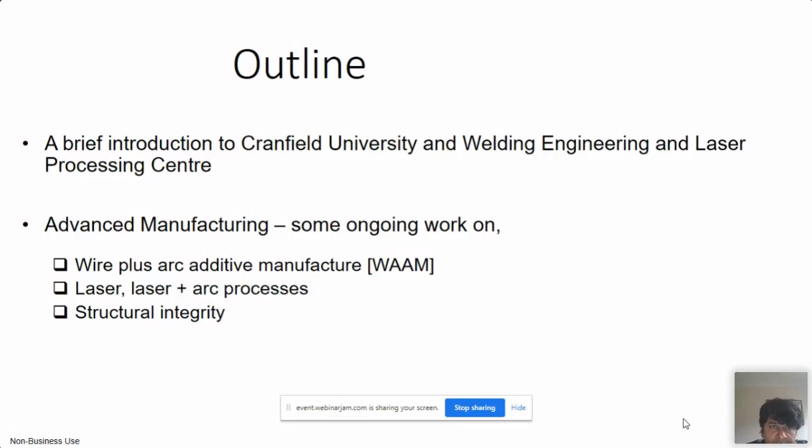First I will give a brief about where we are. We are in the United Kingdom, separated at the moment by about 5,000 miles. Within the United Kingdom, we are located about 50 miles north of London. Our nearest airport is Luton Airport, and Heathrow is about 50 miles south of us.

A little introduction to Cranfield University. It was basically a Royal Air Force base during the Second World War. By the end of the war, it was realized that so much information had been generated during that period that it would be a waste if everything were wound up. So the College of Aeronautics came up in 1946. In 1969, Cranfield Institute of Technology formed, which could give university level degrees. And from 1993, Cranfield University formed.

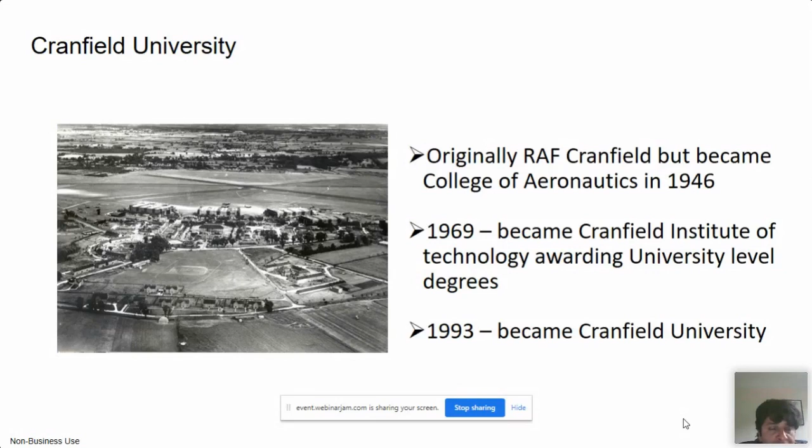I will say a little bit more about our main research activities. We are the UK's number 1 university in aerospace engineering and technology postgraduate education. We are world number 10 in customized executive education. In mechanical, aeronautical, and manufacturing engineering, we are ranked among the top 40 places. Our unique facilities include the Aerospace Integration Research Center, Crash Impact Center, Secure Site, National Wind Tunnel Facilities, National Reference Center for Soils, and Facility for Airborne Atmospheric Measurements.

Here is a bird's eye view of Cranfield University as it is now. You can see this huge runway, which is about 1.2 kilometers long. We have about 4,500 postgraduates. We are a postgraduate university, and our main focus is applied research, which you will see in my next slides.

Our distinctive strengths - on the left hand side you will see the different themes distributed across 4 schools: aerospace, defense and security; energy and power; environment and agri-food; and school of management, manufacturing, transport systems and water. I am part of the manufacturing team, and furthermore I am part of the Welding, Engineering and Laser Processing Center.

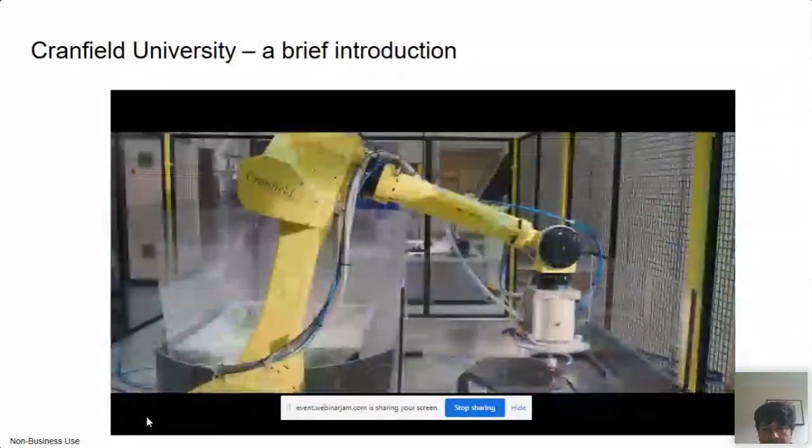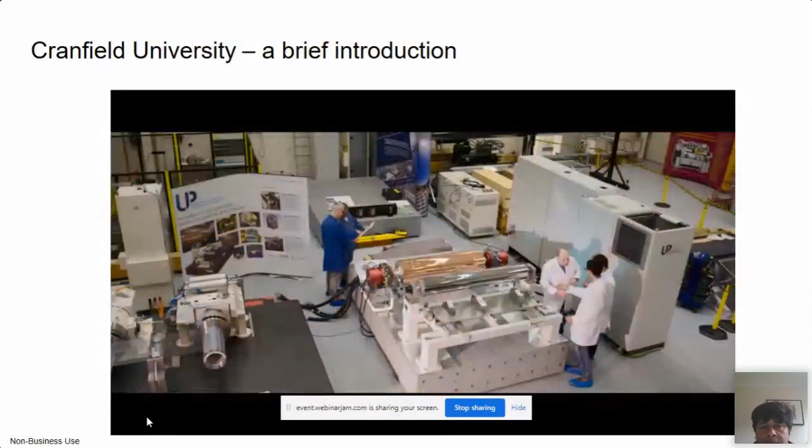As an exclusively postgraduate university, we take learning to new heights in technology and management. We award over 5% of the UK's engineering and technology PhDs every year. 81% of our research is classed as world-leading. Our academics find solutions to global challenges. Our graduates leave ready to launch into high-flying careers. That's why we rank in the UK top 5 for both commercial research and professional development. Everything we do is in partnership, whether it's with individuals, business, government, or industry. Here at Cranfield, we like to aim high across technology and management. Our work reveals new horizons, and we create the leaders to get there.

So this was a brief introduction about Cranfield, and now I will talk about our center, the Welding, Engineering and Laser Processing Center. In the red rectangle on the left hand side image, you can see the size of our building. It was founded in 1961, though not located here at that time. At the moment, we have over 600 alumni with MScs and PhDs.

We have about 7 academic staff, increasing in number almost every year, and about 3 technicians. Normally we have about 10 to 12 postdoctoral fellows, about 15 to 20 research students or PhD students, and we run 2 master's courses now, one on welding engineering and the other on metal additive manufacturing. We normally have about 16 full-time equivalent students in welding, and last year the metal additive manufacturing course started with about 10 full-time equivalent students. So I will give you a brief view of our lab.

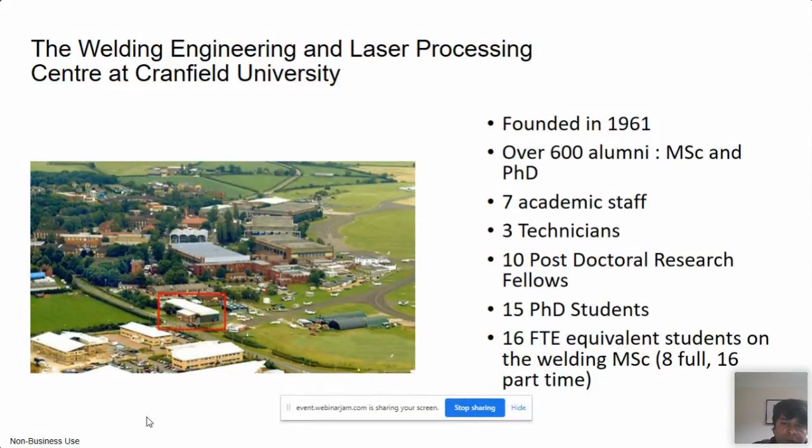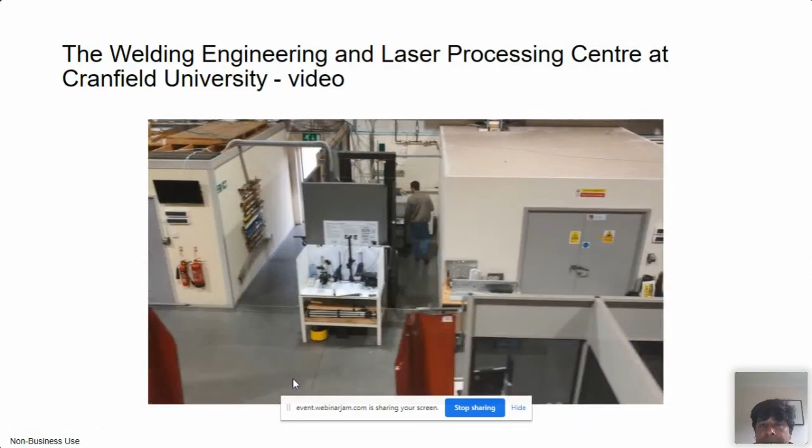So you can see now where we are located. This was done by a student using his drone. You can see the size of our facilities, which I was talking about. It's located over 700 square meters, so you can really do research at a scale where industries feel comfortable, making technology transfer rather straightforward.

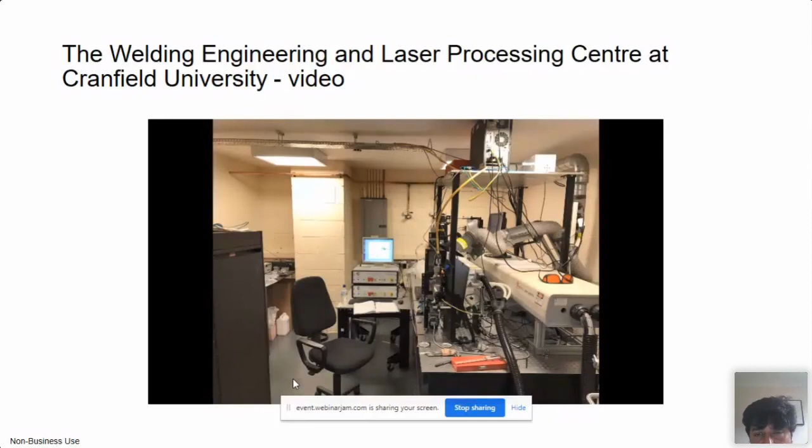We have robotic welding mostly, no manual welding, and what we basically seek to achieve is to understand the welding process. We have all the instrumentation facilities, residual stress measurement facilities, and ways to characterize welds and everything.

These enclosures, as you can see here, are like a tent. We fill this bubble with say argon or something to make an inert environment for manufacturing additive build parts like titanium and stuff.

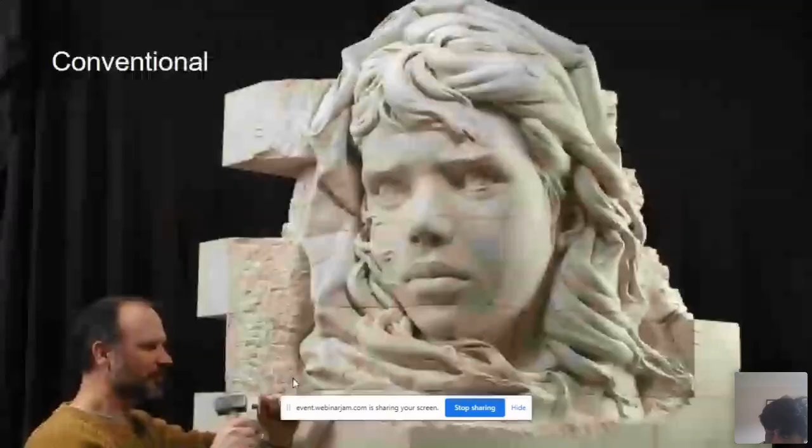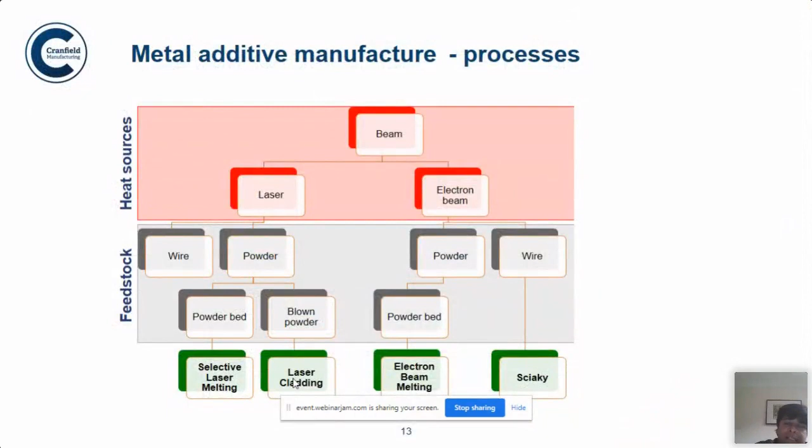I will talk about wire plus arc additive manufacturing now. This is the conventional way of manufacture, where you have a billet and you scoop out the component from it, whereas with additive it's layer by layer deposition. I'm sure you all know about this. We are basically on the right hand side of this image, where you can clearly see we use an arc as a power source, be it TIG, MIG, or plasma.

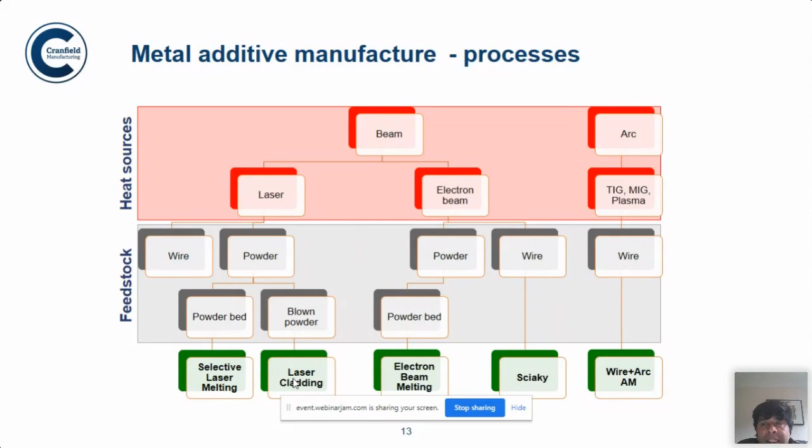This is the major arc, but we also use laser, and we use wire. This is a very clean process because we use wire - when you use powder, the safety requirements and the process can become much more difficult to control, whereas wire is much cheaper and much more consistent property-wise. This process we term wire plus arc additive manufacture.

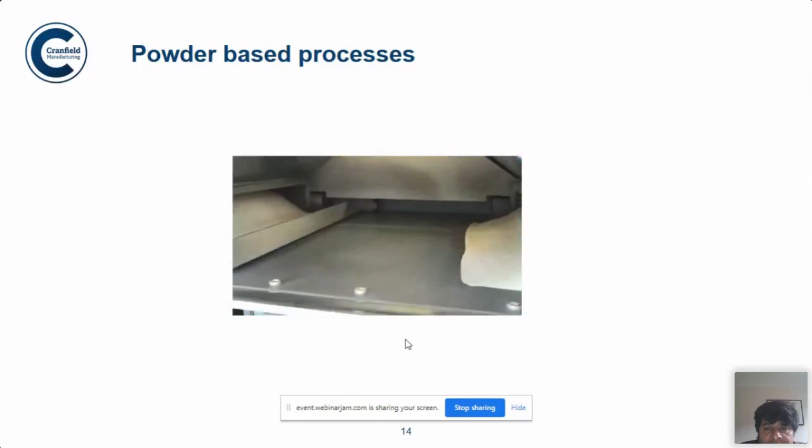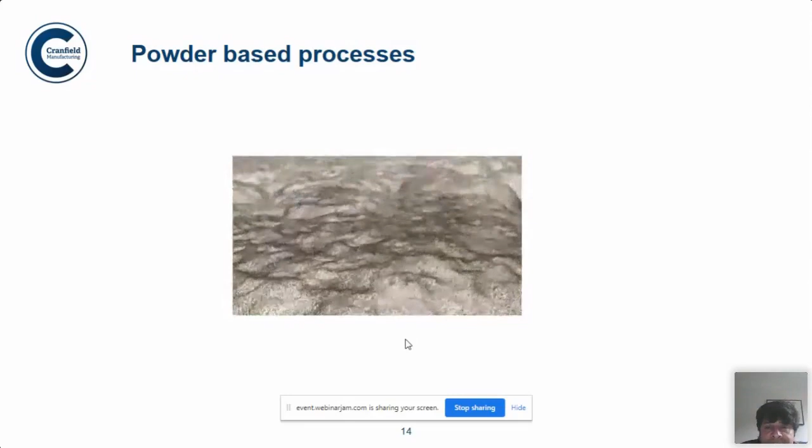I'll just give you some snapshots of what is a powder-based process. As you can see, in the powder-based process you put on powder - this is a powder bed process. Then there will be a laser which will scan the shape in the powder, and the stage will go down, and you sinter the powders together with the help of a laser or a power source, in this case a laser.

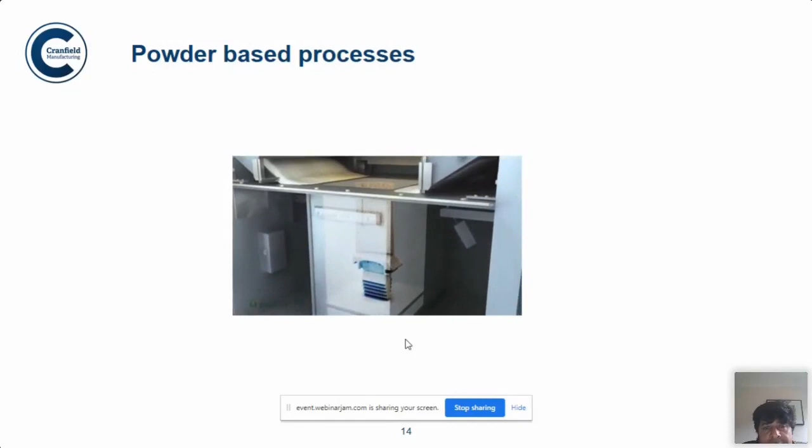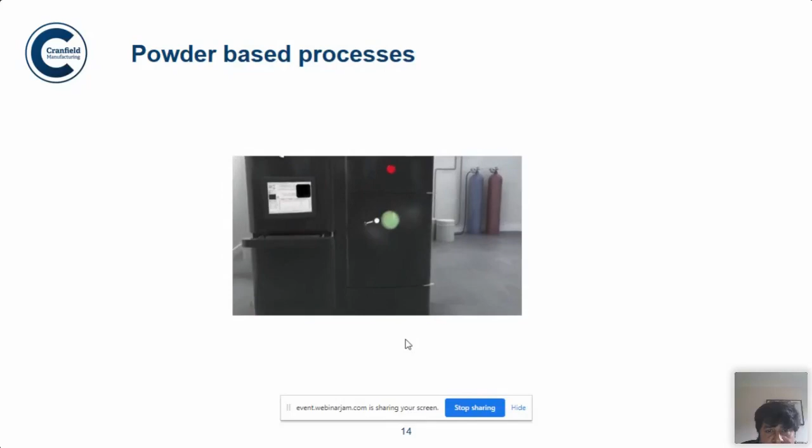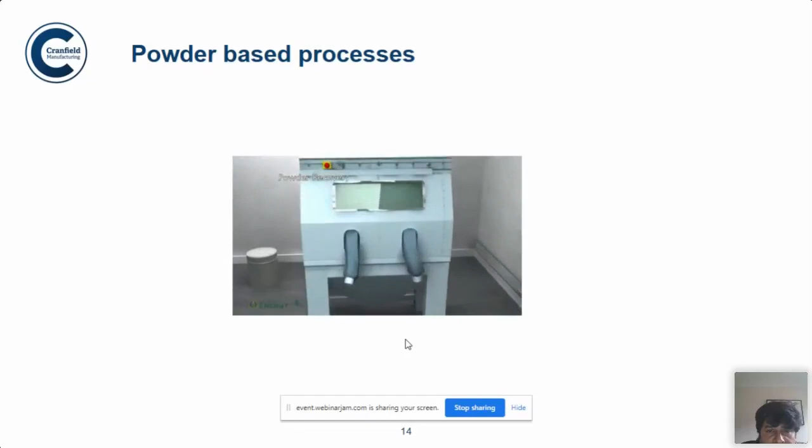At the end, as the bed goes down, you manufacture the component. Once the component is manufactured, it is then cleaned, because there will be powder clinging onto the surface, and you find the component actually sintered inside these superficial layers or superficial powders. So this process is an extremely important process.

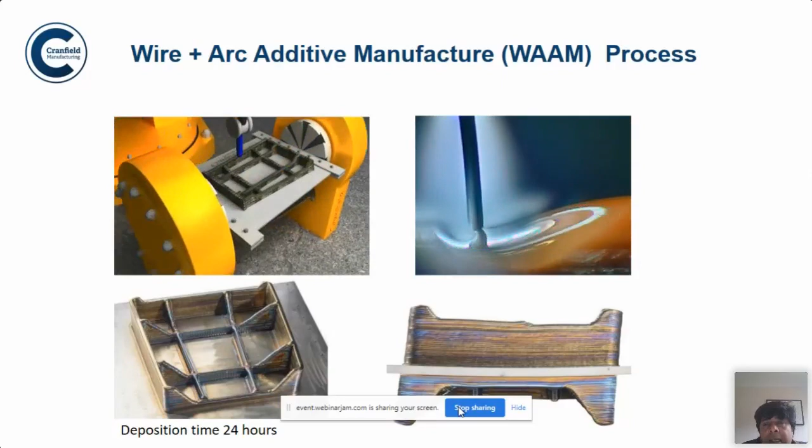Wire plus arc additive manufacture is a different process. I'll just go to the next slide when it's cleared. So this is wire plus arc additive manufacture. In the previous process you saw powder and laser - they are very good at creating very complicated geometries.

The deposition rate in that process is very low. In wire plus arc additive manufacture and near net shape, the previous one is very close to the actual shape and dimension of the component. Whereas in wire plus arc additive manufacture, you see on the right hand side, the ongoing video shows feeding a titanium wire in a welding arc. On the left hand side is an animated image, however on the right hand side, or on the bottom, you can see the real component.

This is a landing gear box made of titanium, and as you can imagine, creating this type of component in a laser plus powder system would be very, very difficult, because the size of the component is in meter scale rather than millimeter scale, and the dimensional resolution you need is not as high as that. So you can machine this and make your component.

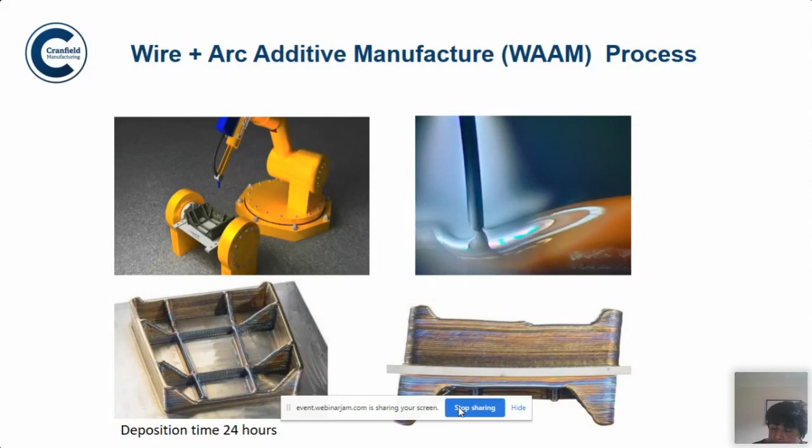So why use additive manufacture for production of large parts? This video shows the importance. You saw at the beginning there's a large billet which was then scooped out to form this part.

When it comes to expensive alloys such as titanium, the cost is prohibitive because you are losing a serious amount of metal. We call it the buy-to-fly ratio - how much you are buying versus how much is actually flying. In this particular example, there is a huge loss of metal because you are machining out, and the scrap titanium is about two orders of magnitude cheaper than the titanium billet.

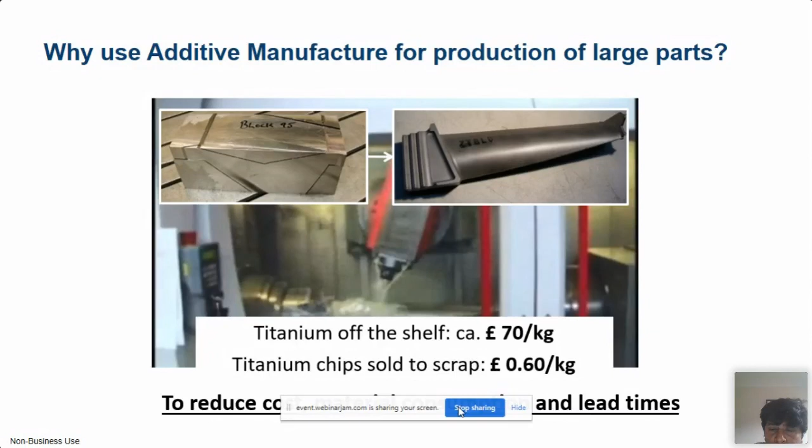So to reduce cost and lead time is the specific business case for wire plus arc additive manufacture. These are the major business drivers: reduce lead and response time, logistical simplicity, supply chain innovation in component design, reduce weight, lighter and more durable, material saving, improve sustainability and recyclability. So these are the main business drivers for wire plus arc additive manufacture.

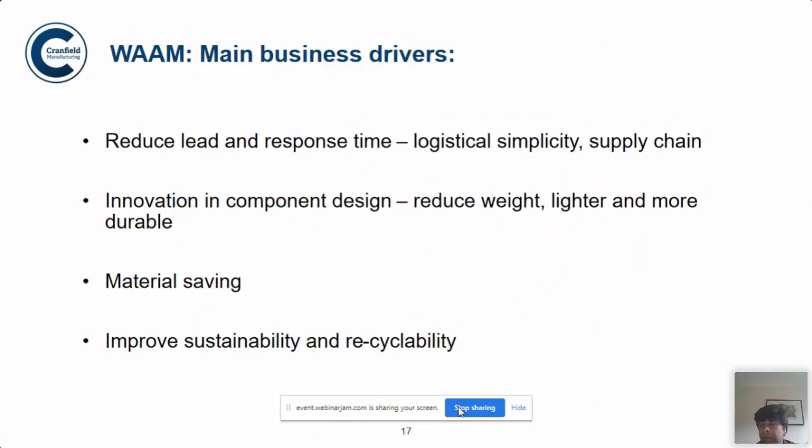Now, there are several attributes shown in this spider diagram, like complexity, accuracy, cost saving, material utilization, mechanical properties, post-processing requirements, platform flexibility, part size and all. You can see different additive manufacturing processes were compared: powder bed, blown powder, laser and wire, WAAM, and higher deposition rate, which is the CIT process.

Now you can see WAAM is placed in a very nice manner for many of the things, particularly cost saving, material utilization, mechanical properties, post-processing requirements. There are many of them that are much lower. I mean, the criteria for selection of this process is much higher.

And the main important thing is buy to fly ratio. When it comes to buy to fly ratio, in case of WAAM, you can easily achieve something like 3 to 1. Which basically means 3 kilos you're buying and 1 kilo is ready to fly. This makes this process incredibly lucrative for businesses. Although powder bed and all those things are very good to create very fine crystalline structure, the deposition rate is not as high, and as a result the cost of production could be much higher.

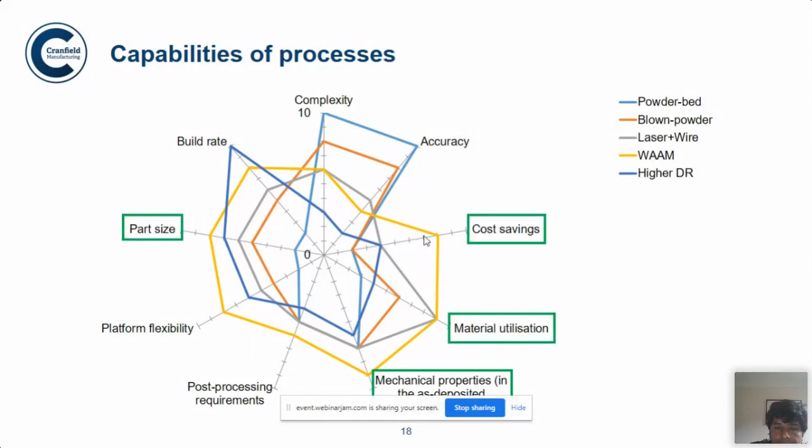So this is a process of shaped metal deposition which I was trying to show here. We started this process quite a while back, and as you see, this is the concept of the component, and then a CAD drawing was made and layer by layer manufacturing was done to create the component. The material is Inconel, number of layers 144, deposition 2.44 hours.

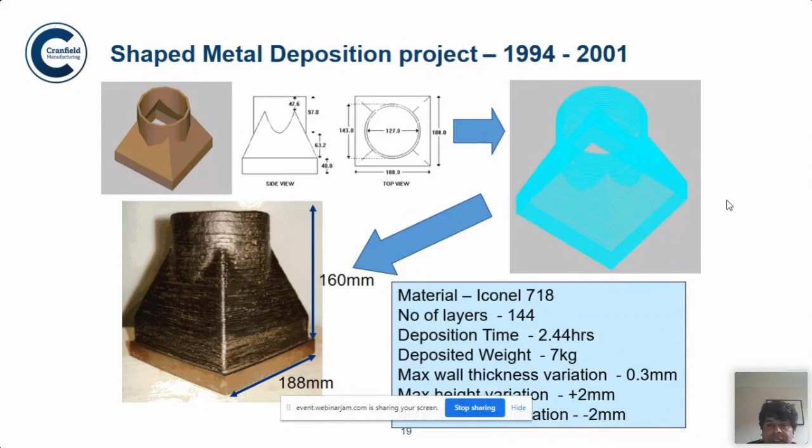And since then, for the last 18, 19 years, we are working tirelessly on this particular manufacturing technology, and now it has gone to a level where you can really do lots of different things.

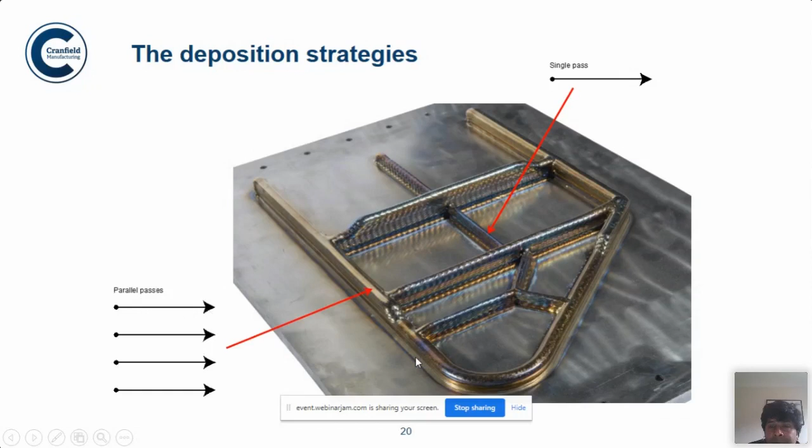So this is an airframe, titanium airframe. As you can see in this particular frame, we keep this in our center just to show the different types of deposition strategies, the complexities that you can use. So a few of the layers were made with single pass, a few were laid with parallel passes, a few were laid with oscillatory passes, and so these are the different processes that you can use for creating a large part.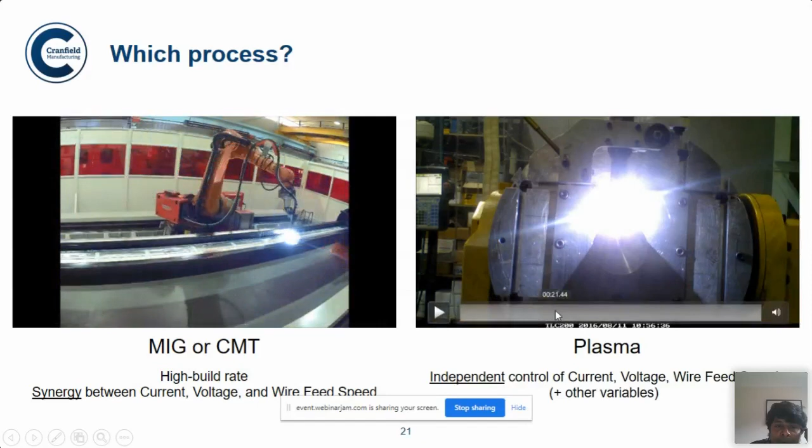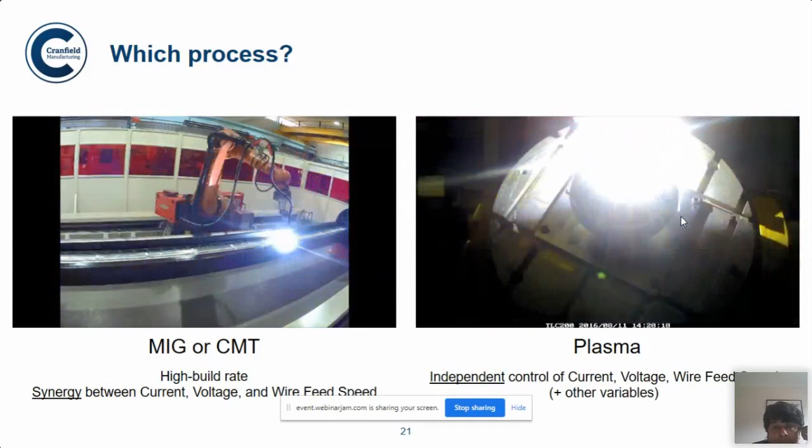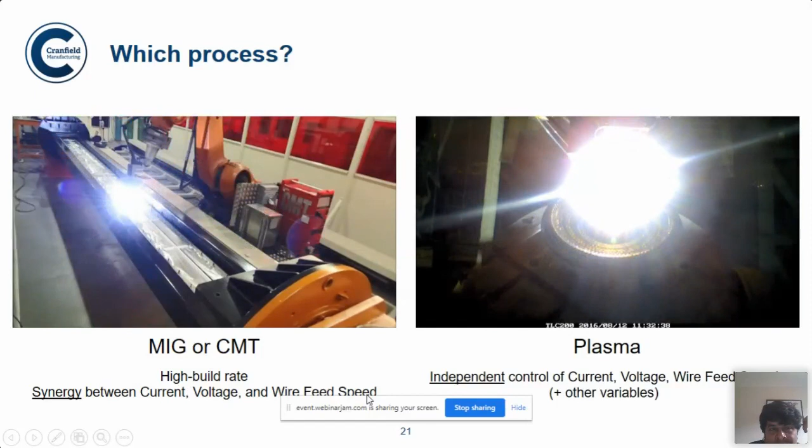So which process to use? There are processes like MIG and CMT. You see this is the aluminum spar developed by this, and then there are processes like plasma. So there are different types of processes that you can use. All have different attributes, like MIG or CMT gives you very high build rate, synergy between current, voltage and wire feed speed, which basically means in a MIG process you really don't select lots of different parameters. What you select is basically the wire feed speed.

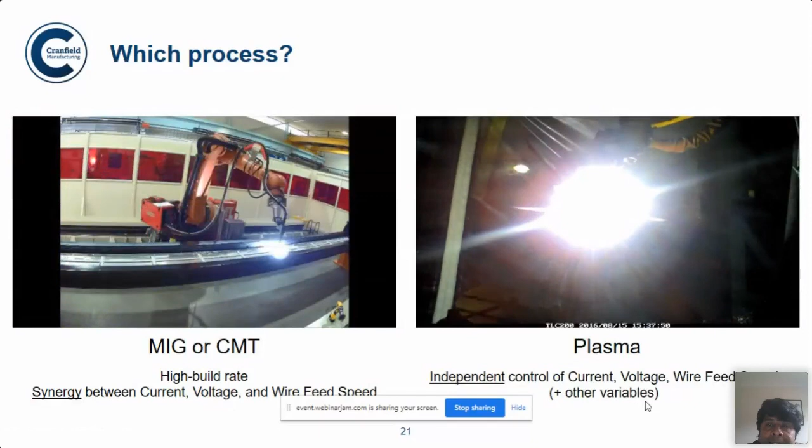Whereas in case of plasma, you have individual control on current and voltage, and that makes plasma a really very attractive process for wire plus arc additive manufacture, because there are different types of shapes that you need to form, and your deposition rate needs to be changed even within the same layer, and as a result you need to have individual control.

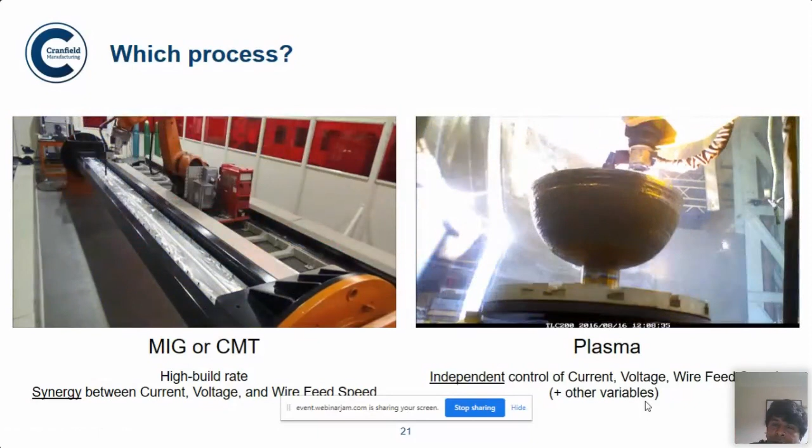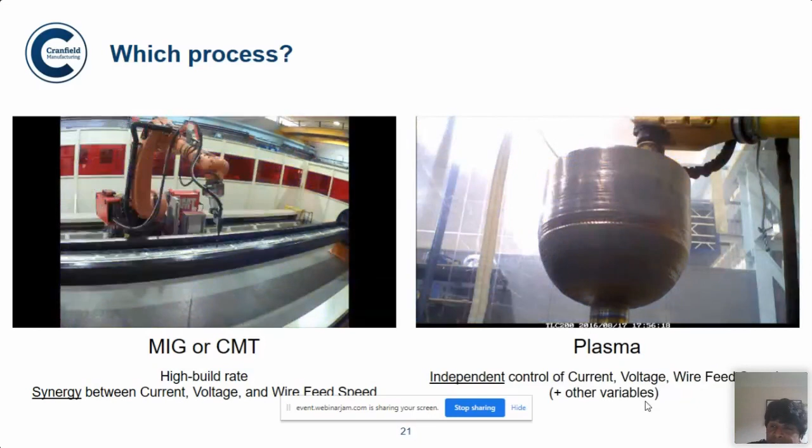So for specific parts, if they are straightforward, you can go for a MIG process. If it is complicated and the geometry requirements are complex, probably you have to go for plasma. Of course, plasma has less efficiency, i.e. deposition rate. However, it is a very clean, very controlled and nice process.

This is just to show you, to impress on you how difficult this process is. In a steady state, as you can see, all is very good. But when it comes to a junction, you can see the weld pool shrinks. You will see that many people can develop a wall, a single wall, a simple wall is quite straightforward. But when it comes to a very complex component, it can be incredibly complicated.

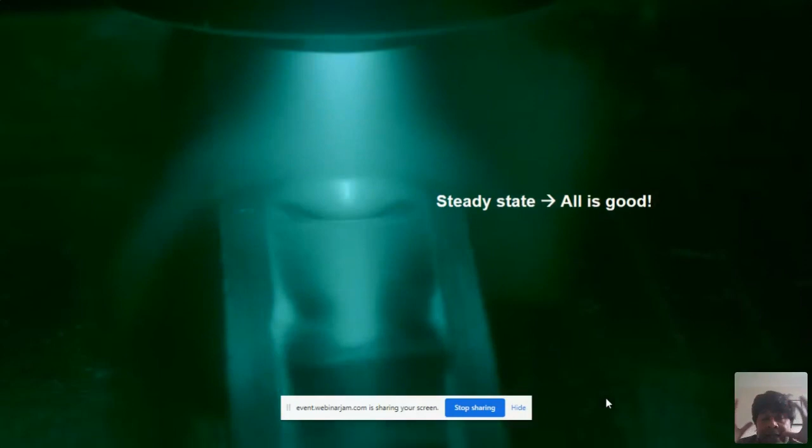This particular video is showing how the fusion zone shrinks when it comes to the junction. And as it comes to the junction and shrinks, what it basically means is that you have probabilities of forming lots of different types of defects in this area. As a manufacturer, what is required, or what research is mainly directed now to understand, is how you can overcome this kind of obstacle in order to make a defect-free component by using this process.

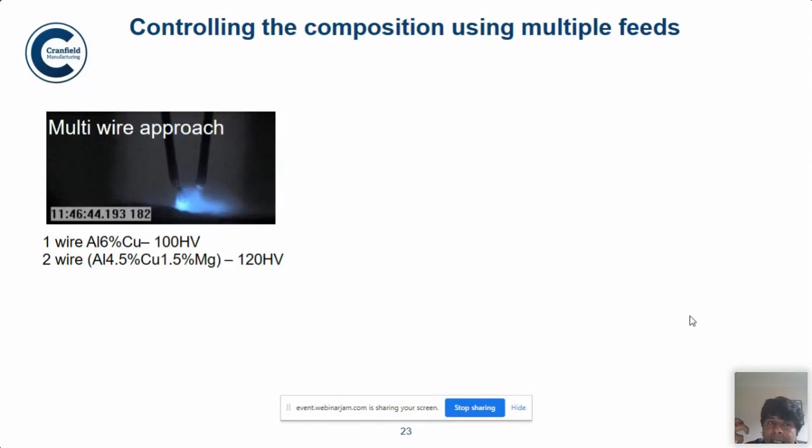Controlling the composition using multiple feeds is one of the design flexibilities offered by the WAAM process. You can have multi-wire in an arc, called tandem welding, with different grades of wire going into the same pool. This allows you to control the weld pool composition and thus the solidification path, reducing chances of cracking.

This is particular work done a few years back, where the copper and magnesium ratio within the weld pool was controlled to achieve solidification-crack-free welds. The same principle can be transferred to additive manufacture.

You can add more than two wires depending upon the composition and melting point. You have to make sure the heat is sufficiently high so that three wires can be melted and accommodated in the weld pool.

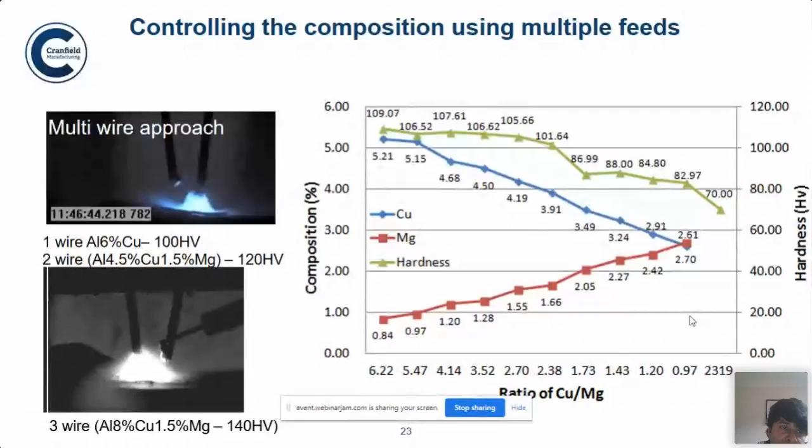This was made for a brake pad application to create a brake pad with very high thermal conductivity, because when the brake pad is engaged against a brake disc, the temperature rises rapidly at the interface. You need the heat to be conducted away so it doesn't affect integrity, while also needing sufficient abrasion resistance. These composite structures are created with tungsten carbide powder and steel wire for such functional applications.

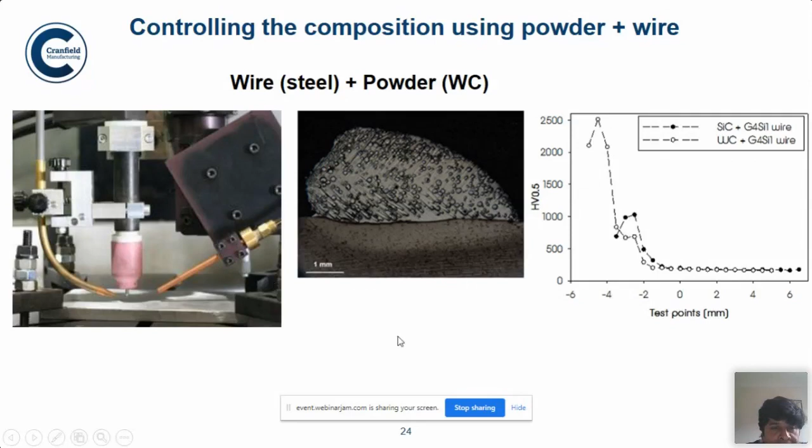These are all different design modifications you can do, applying different materials and alloys. Previously with traditional processes, designers were limited by what processes were available. Now the advent of WAAM is pushing that limit, making it possible to create topologically optimized designs and produce components using WAAM or similar processes. There are multiple examples of mixed material.

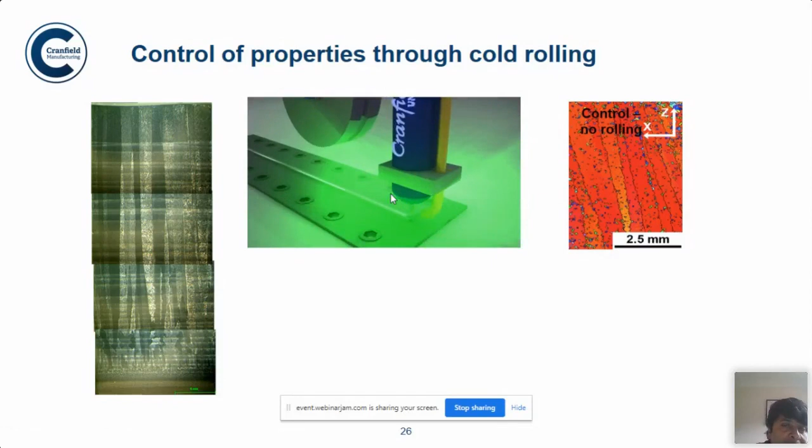You can see the grains going vertically down, near the substrate and in the deposits. We invented a process of cold rolling, where when we deposit, we roll a layer, and in doing that you induce cold straining in it. The rolling of the layer is done at a lower temperature, below the recrystallization temperature of the alloy.

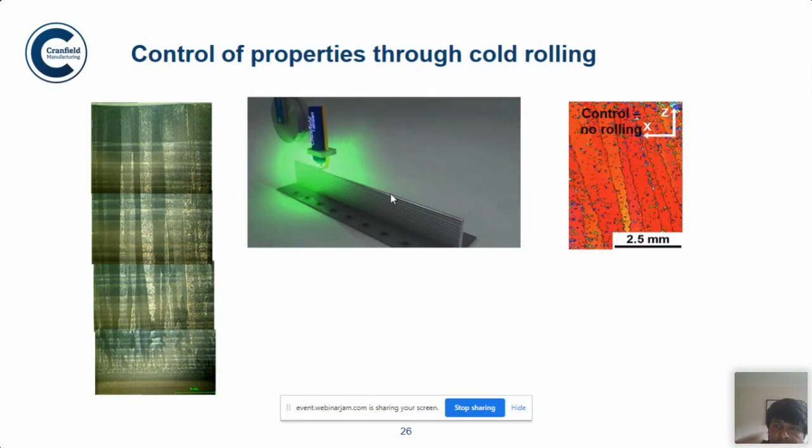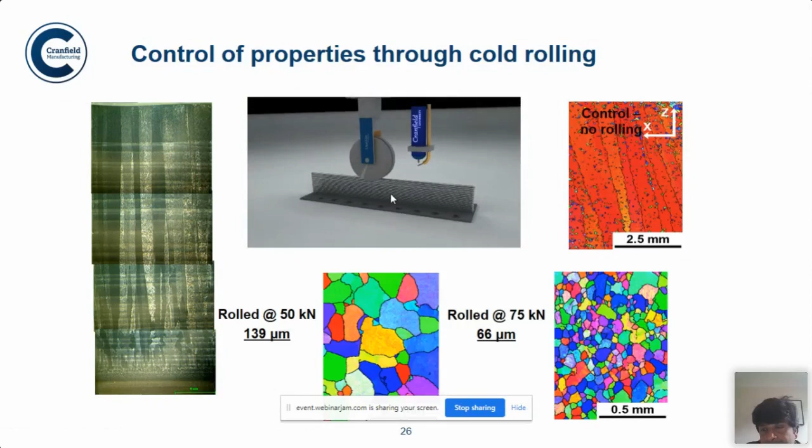So you deposit a pass, wait for some time, and do this rolling, inducing cold straining. When you deposit the next pass, you redistribute the strain. So you're not creating a recrystallized structure necessarily, but you're creating high angle grain boundaries as compared to the columnar dendritic grains.

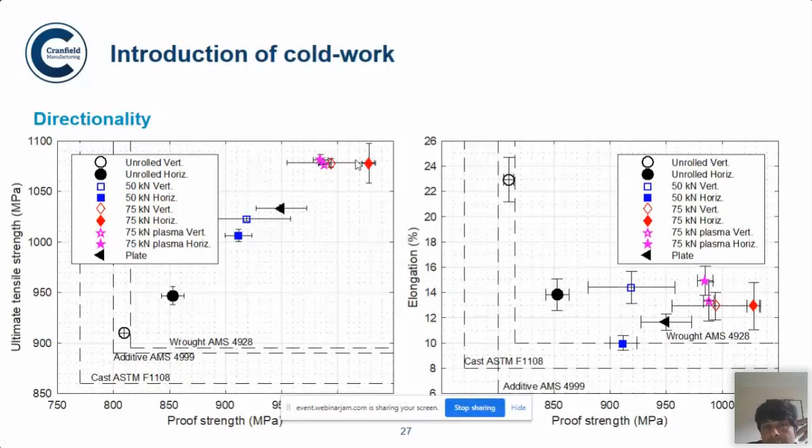Whereas when you roll, with these different rolling loads applied, the properties almost merge - you don't have directionality anymore, and the properties have increased tremendously. This black triangle shows the plate, which is a wrought alloy. So you can create properties in the deposit with similar or even higher strength than the wrought version of that alloy.

Rolling can be quite complicated because it needs a large frame to put the rolling load onto the structure, and doing rolling on complex shapes can be quite difficult, it's quite impossible. So what you do here is machine hammer peening. This is a fantastic tool which does the same thing as rolling, but is much more flexible, and we are studying this at the moment.

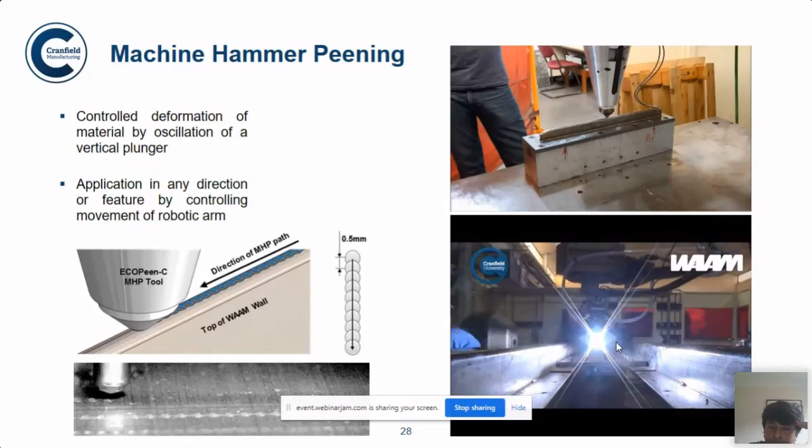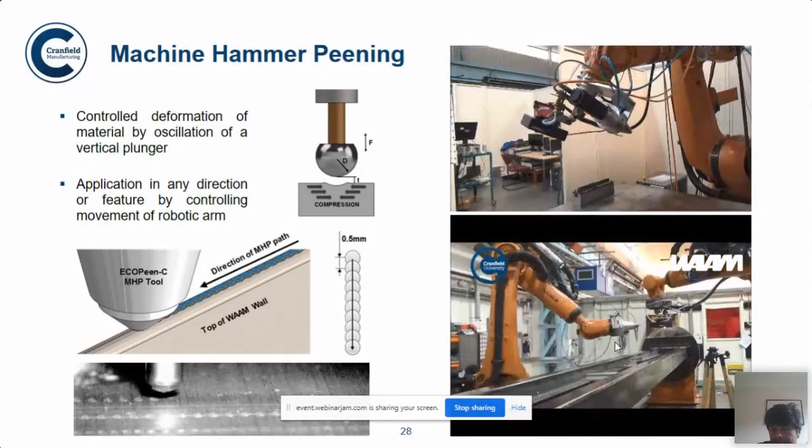So what happens when you peen? You form compressive stresses, and when the next pass is deposited, you basically manage to get a sort of recrystallized layer.

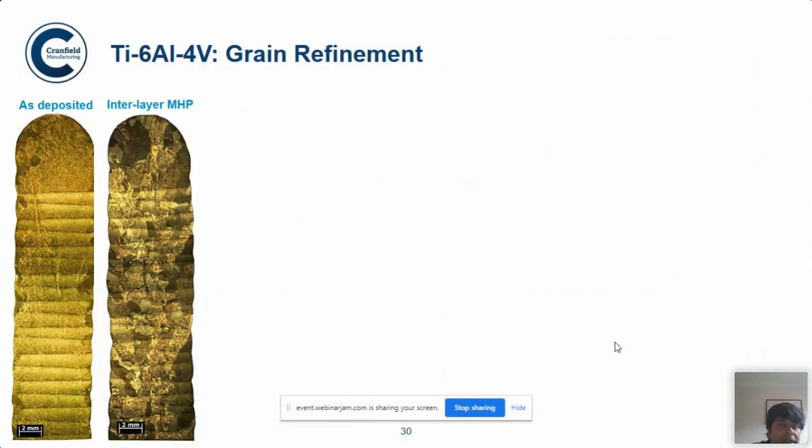So average grain size was reduced, and the strain depth was measured, up to what depth the machine hammer peening is inducing the strain, because as I said, it is done in cold condition, and you have to have a proportion of the layer height and the straining that you can induce.

Property wise, just concentrate on these green ones here. The green ones are the as-deposited samples, which are much lower, and the rest are peened. You can see that the property has moved up substantially, both in terms of UTS and YS.

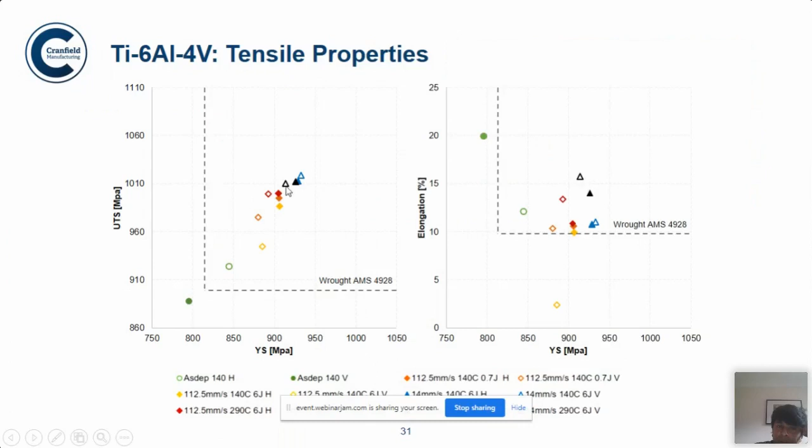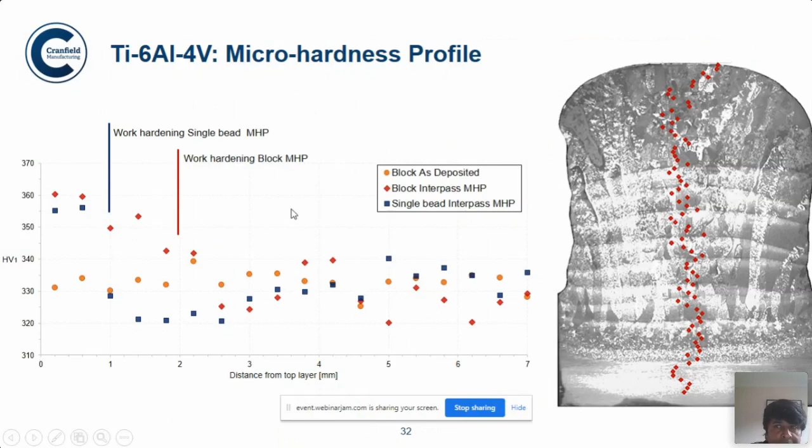So this is some more examples of a hardness map, showing that when you peen, your hardness goes up, which basically indicates that it is strain hardened. This is quite natural, and because of that, you're getting the recrystallization after laying the next or following bead.

So these are the things that we are starting in WAAM plus additive manufacturing. I will now share some of my work in the area of application of laser joining. So, specific advantages of laser — why do you use laser in advanced manufacturing? It can produce very high power density.

The spot size over which a laser welds can be a few micrometers to a few millimeters, and therefore you have very high flexibility in application of energy density, which is the third point.

It can create different welding modes. I'm sure you have heard about terms like keyhole welding, conduction welding, and all these can be done very flexibly using a laser. You have very high spatial and temporal resolution, which means where you apply the heat can be controlled to a very high degree, and temporal resolution means for pulse lasers, you can have very accurate pulse shapes, so the application of energy with respect to cycle time can be controlled very easily and accurately.

Higher power density generally gives you lower heat input, thereby lower distortion, higher productivity, and all this.

As I said in the beginning, I will talk a little bit on the laser plus hybrid process. So why do you use laser? For productivity, and for very accurate welding, such as in e-mobility where we are joining copper that is say 0.5 millimeter thin, 1 millimeter thickness, and therefore you need a very accurate heat source. For that, laser is used. The other important thing, laser for high or thicker structures, is laser plus arc processes.

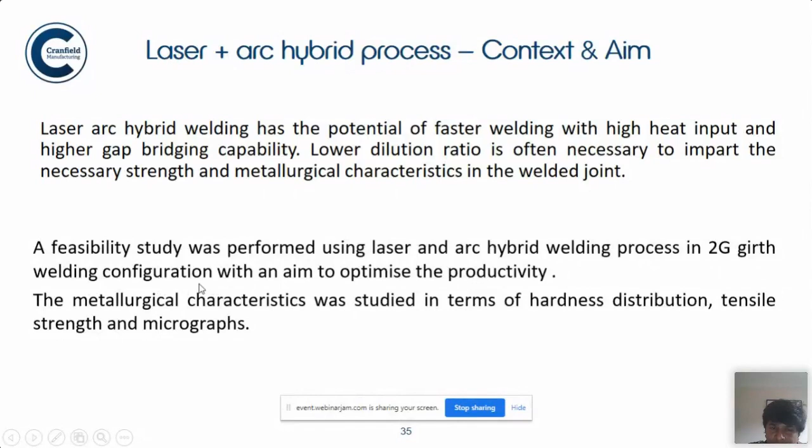So we have done a feasibility study using laser and laser plus arc hybrid process in 2G welding configuration with an aim to optimize the productivity. So you will see in the next slide.

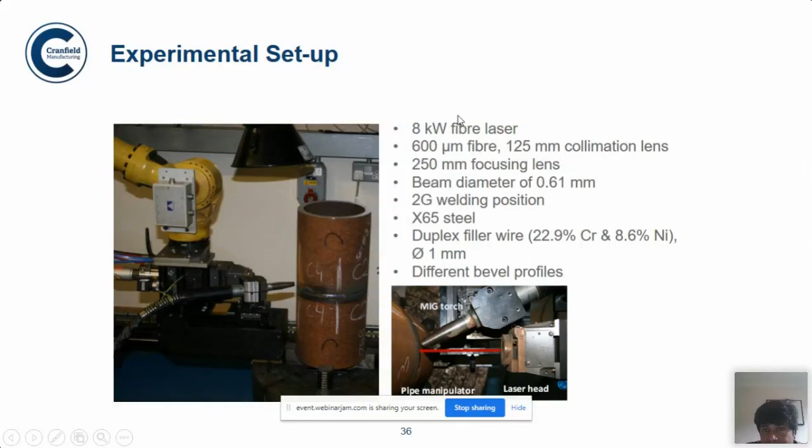So this is the setup. This is the pipeline that we are welding. This is 2G configuration. Basically the pipe is vertical and the welding torch is coming horizontally. Some details are given here, which is not very important at this stage.

So this particular experiment was done with duplex steel, actually, just putting chromium as a signature element to understand the performance or the response of the different arc and laser power sources for creating a proper homogeneous structure.

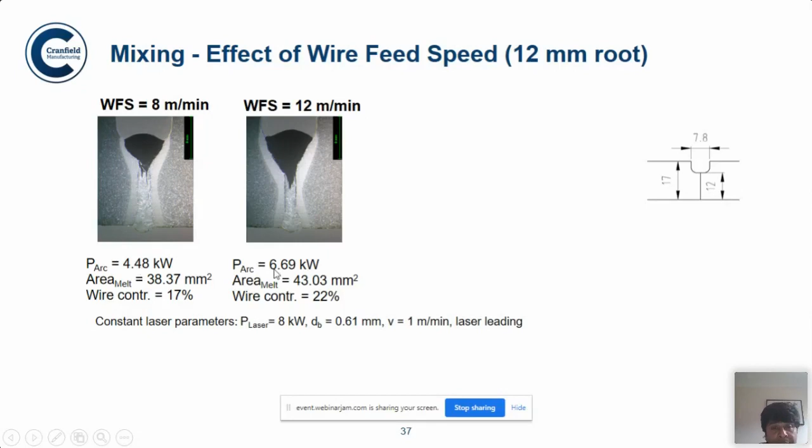So now we increase the wire feed speed, which means we increase the arc energy. Now arc energy is shown here, as you can see, from 4.48, now it is 6.69. And slowly as we increase, you can clearly see how the mixing is accomplished. So now, using laser plus arc, you create a completely homogenized structure, a completely homogeneous weld metal, which will be as good as it can be if you use a normal arc process.

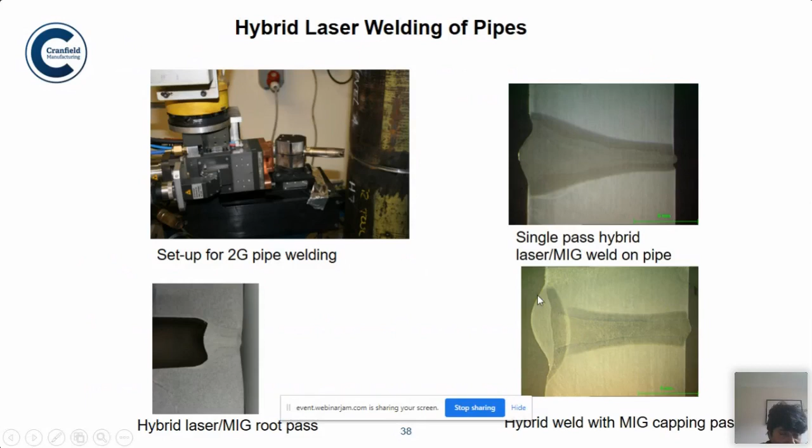So other research areas at Cranfield at the moment, we are seeking application of laser in dissimilar joining. If you're interested, I can show you later what a dissimilar joint is, and some specific research that we did on transportation, nuclear power, marine structures, joining of functional components for e-mobility applications. This is the hot topic of the day, e-mobility, where we are joining copper and different dissimilar configurations like copper and aluminium, copper and stainless steel, and similarly aluminium and different dissimilar configurations, aluminium with copper. So we have done a huge study in these areas.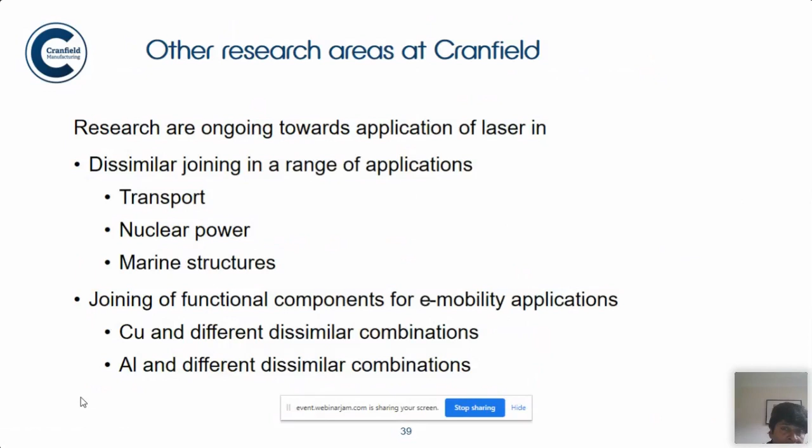Now we'll talk a little bit on the structural integrity by laser peening process. So we have a laser which can peen, which basically means - this is basically the peening process in a schematic.

So you can see on picture A, there is a laser pulse which comes and hits the surface of the metal, and then there is an overlay, a transparent overlay of water here. Sometimes people use what we call an ablative layer, sometimes people do not. When you don't use one, the metal itself will vaporize. So you bring this at a very high power density, in the tune of say 4 gigawatts per centimeter square for aluminium. Then you heat it very hard, the aluminium vaporizes, it tries to escape the surface, but this water will prevent it from escaping.

So what will it in turn do? It will send a shock wave inside the workpiece, and the shock wave will help you in creating a residual stress field by elastic pushback. And this residual stress field will be compressive in nature. This compressive stress field is very good for prevention of fatigue crack propagation and opening. Why? Because when you have a compressive stress, then the crack doesn't open. Crack opens under tensile stress.

So the compressive stress, when superimposed - say you generate a compressive stress of minus 200 megapascal. Now in your actual application, the tensile stress that it will be subjected to is say 250 megapascal. So then basically the stress that is acting on it is 50 megapascal. So you have reduced the magnitude of stress, and you can see here that you create a very large compressive stress.

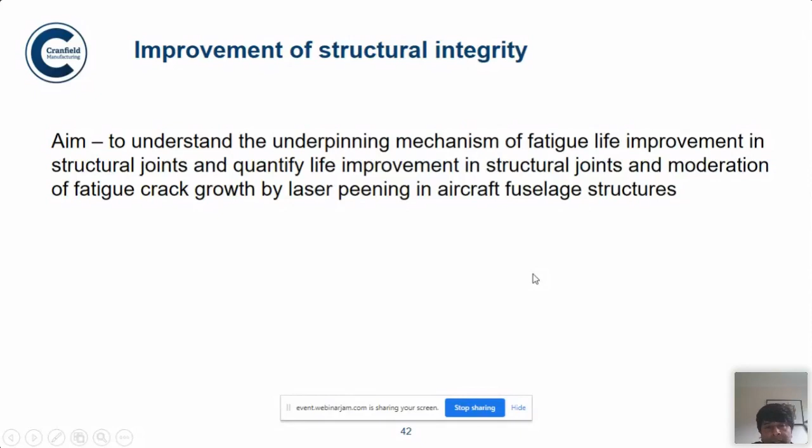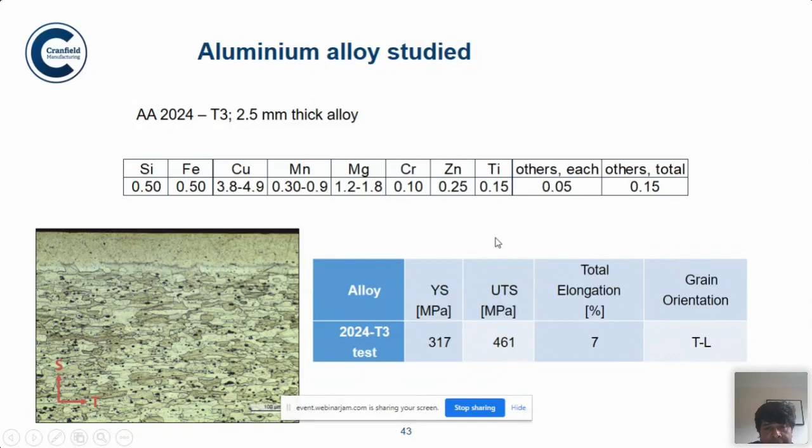So these are the properties that were shown - this is nothing new. So this is what is new: what we did was laser peening. These are structural joints, basically bolted. Now in this area, the main fatigue crack starts from these bolted areas.

Why is it so? Because there are a few mechanisms. One of them is the abrasion that results in crack propagation, and also it is subjected to fatigue. So fatigue and abrasion are the two major failure mechanisms active on these holes.

Now this shows the jointing mechanism. We peen both the surfaces and do a patch peening as shown here, and this is the array of holes and they are peened. People always find that failure happens at the top row or the bottom row - the middle row was never affected by this process. So in order to strengthen this part, we only peened the top and bottom rows.

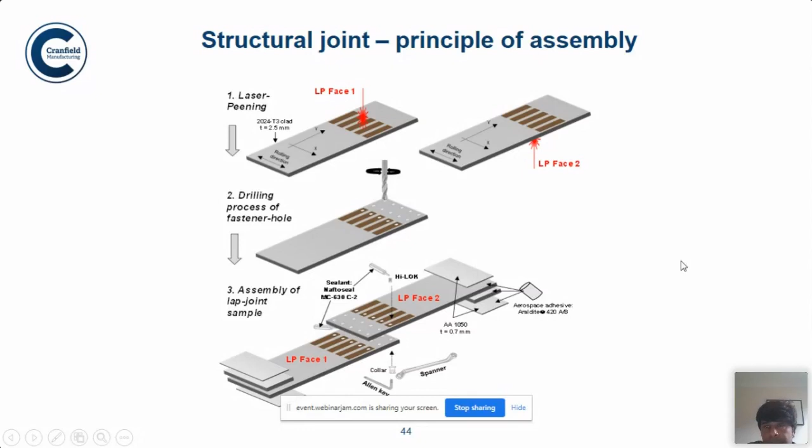So these are some examples. There are different types of peening that we studied - we call this stripe and we call this patch. As you can see, the peening process creates a good amount of residual stress, compressive stress, which is balanced by tensile stress far away in the plate. This plate is 2.5 millimeter thick, and the crack will propagate through the thickness, so the main target is to prevent crack propagation through the thickness. You can see here all the different types of stress profile that we obtained.

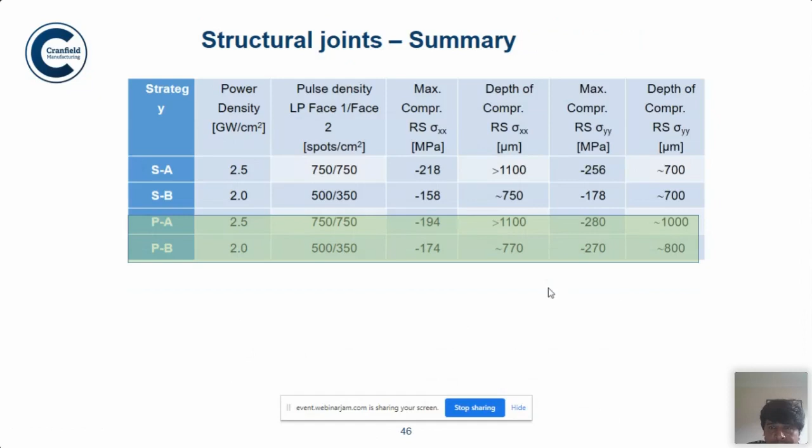Just keep an eye on this PB configuration, which gives you a maximum compressive stress of minus 270 and minus 174. We will see that this particular peening is much more helpful. So this is the peening results of the P samples.

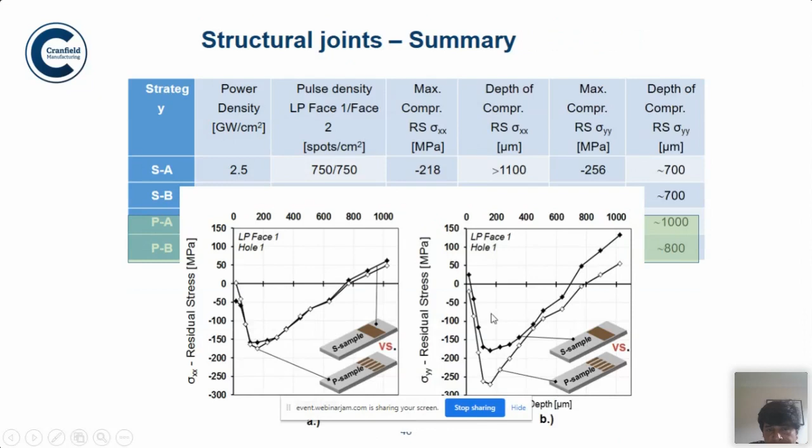Now if you look carefully, because it is stripe, the entire thing is compressive along the whole length and width, which is really not required, because it means the balancing tensile is forming somewhere in the middle of the specimen. Whereas with patch, you create compressive stresses around the holes, but in between two patches the balancing stress field is forming.

So you see, this particular design is more useful because the crack will never start from here - it will start somewhere here, and you create a large compressive stress around that. The crack will propagate through the thickness, and therefore you're minimizing tension here because your balancing tensile is forming elsewhere. These are the things you need to understand when designing a component for a particular application.

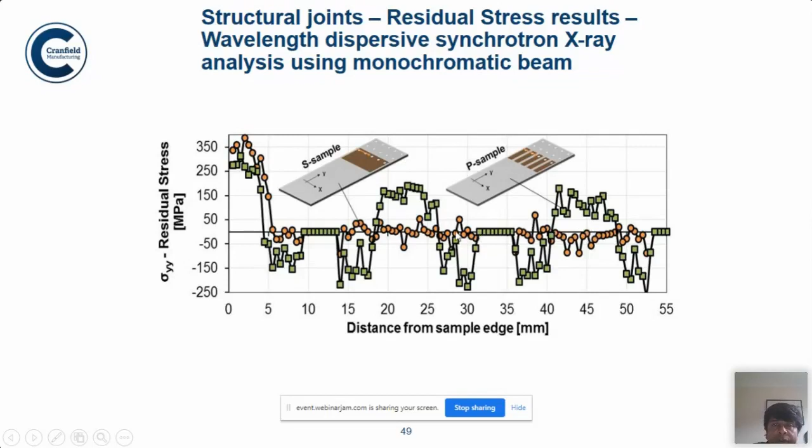So this is basically the overall stress configuration. You can see here the black one is the stripe sample, S1, which has a very large tensile core, which basically means that when the crack starts and reaches here, it will tear through it quite quickly.

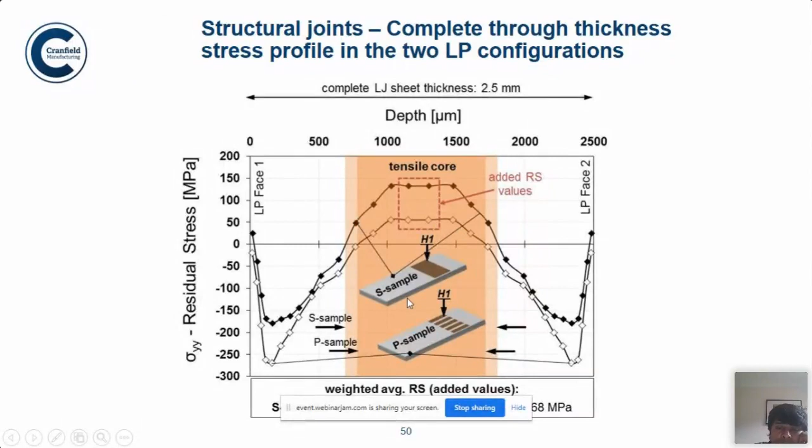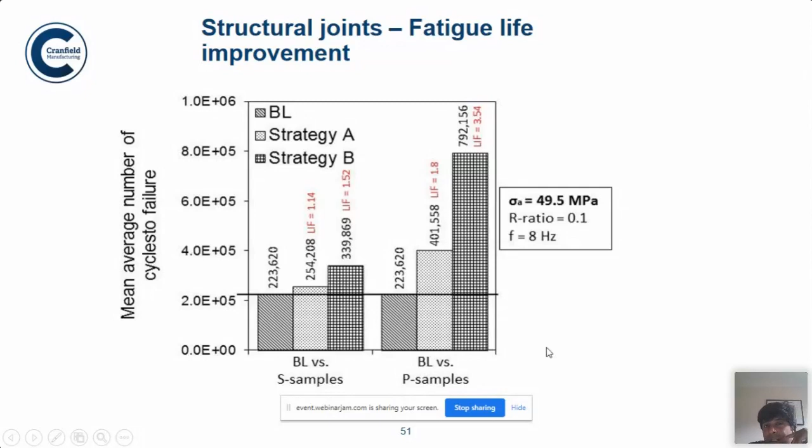So these types of studies actually show how you can improve the life of a component, and thereby you can save material and design a much thinner structure. This is the previous result shown in a graphical form, basically.

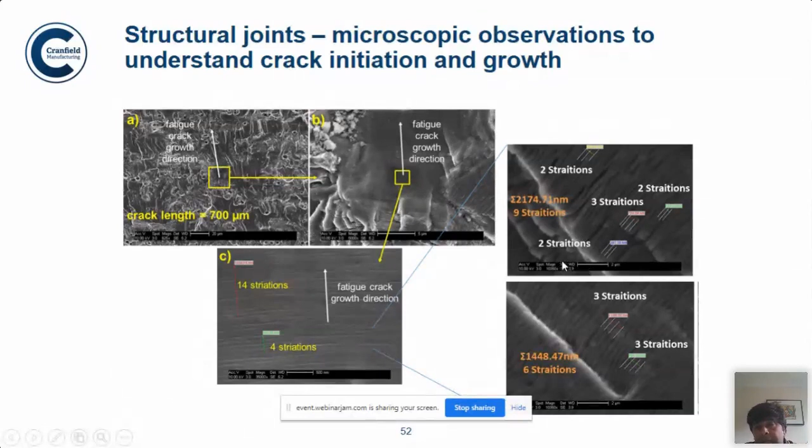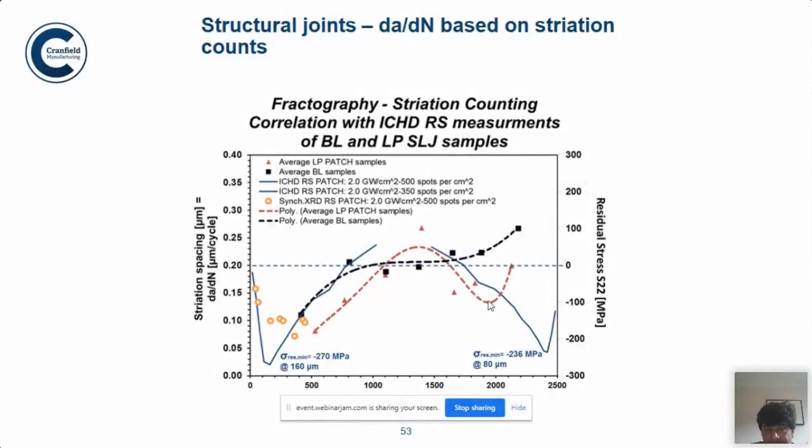When we measure the fatigue striation spacing in SEM, striation spacing basically gives you the crack propagation rate, da/dN. Follow this red line. There's a lot of data in this graph; some shows the residual stress, and the crack propagation or striation spacing is shown by this reddish triangle. You see it is quite low, then at the middle it is high because it's tensile at the middle, then once again it becomes low. This clearly shows that the fatigue crack propagation rate is reduced significantly by the peening process.

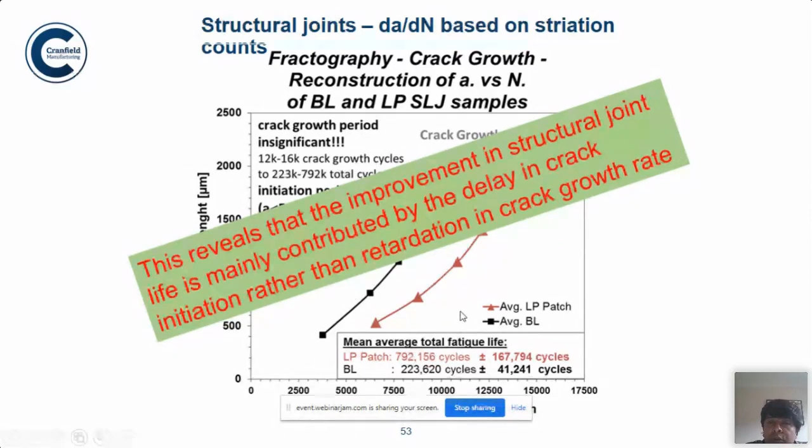All these studies you can do by understanding the crack propagation and the effect of residual stress and everything. Modern quantitative characterization facilities like neutron, synchrotron, high resolution SEMs will allow you to understand everything. What you need to do is understand the mechanism or the underpinning science, and then apply it judiciously in improving life, in creating new manufacturing processes.

So this is my last slide. My thoughts are: the main purpose of research in manufacturing technology is to reduce cost, basically by two methods: reduction of material consumption and reduction in overall life cycle. So even if the manufacturing cost is high, if the life cycle of a component is increased by 10 times, then the overall life cycle cost is much lower. People are ready to pay once they understand the importance of it.

The recent advances in design technology allow complete topographic optimization of a component. Therefore our job now is to adopt the principle of design-led manufacturing. Designers should not be tied up with the manufacturing process; the manufacturing process should be freed up, and designers should do topographic optimization of components using multi-material, using application of anything—functional, structural components. As a manufacturer, our main aim should be to use all the latest advancements like laser, additive manufacture, peening, and all the different processes available in order to generate those topologically optimized components in a cost-effective manner. That will be the future of advanced manufacturing, as I understand.

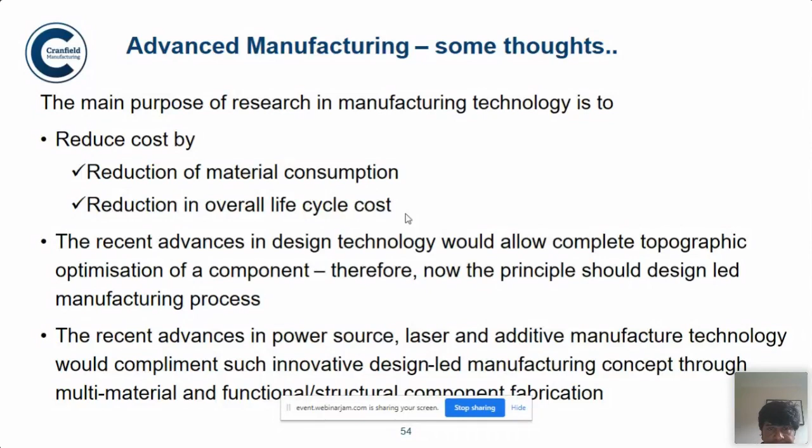Yes, sir, yes sir, thank you sir. Thank you so much. Thank you so much for sharing your knowledge. It was a nice presentation, and he has given a lot of information on additive manufacturing, wire additive manufacturing. I hope this will be highly useful to the researchers participating, and their research knowledge might have been enhanced, helping them get into further research. Thank you, sir. Thank you so much. You're welcome. I'm slightly late actually, it is almost... No problem, sir, no problem sir.

Sir, Mr. Chandramouli Ramaswamy had asked one question. Is it possible to perform laser peening on gas turbine blades?

Absolutely. The whole point of laser peening—laser peening is in operation for some of the very high-end applications like gas turbine blades, particularly in aircraft, and therefore it is possible and used for very niche applications at the moment, like gas turbine blades. But our target is to make it more cost effective. At the moment, the cost of a laser which does such peening is quite high. The pulse energy required for such laser performance is more than 1 joule. One of the major suppliers of laser peening is called—I forgot their name—MIC, Metal Improvement Company. The lasers they use have quite high power; the pulse energy is close to, as I understand, 10 joules, which is extremely high and expensive. So one of my research activities is to create peening with smaller pulse energy.